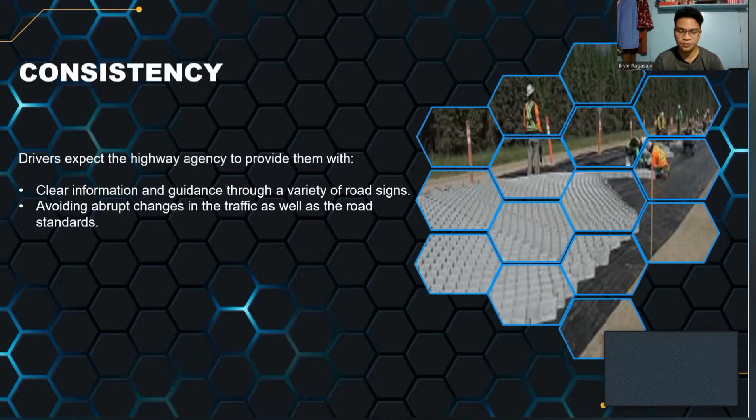Consistency. Consistency is the most important single rule in highway design, that is, making every element of the roadway conform to the expectation of every driver. Among the promising approaches to improve highway safety performance is the concept of highway design consistency. Drivers expect the highway agency to provide them with clear information and guidance through a variety of road signs and avoiding abrupt changes in the traffic as well as the road standards.

If these guides and directions could be planned properly to convey one single message at a time, and if these directions could be followed smoothly and easily without undue haste or changes in speed, then the road facilities are considered satisfactory, meaning if we're able to follow directions smoothly, then there will be no problems. Experienced highway engineers recommend that highway signs and directions should be integrated as early as preliminary layout studies.

Now, AASHTO is the American Association of State Highway and Transportation Officials. In 1914, the American Association of State Highway Officials, or AASHO, was established as an association of state, territorial, and District of Columbia highway departments and the Federal Highway Administration. The name was expanded in 1973 when the Department of Transportation was integrated into the association, renaming AASHO to AASHTO, giving the officials of this agency the power to govern its operation.

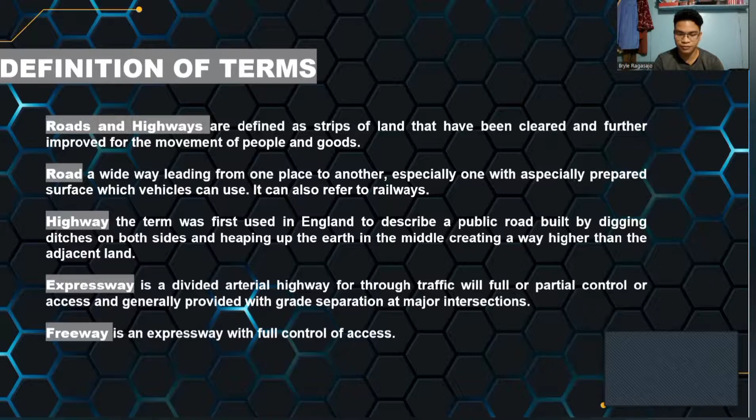Control of access is a condition where the rights of the owners or occupants of adjoining land or other persons to access, light, air, or view in connection with the highway are fully or partially controlled by public authority. There are two types of control of access, full and partial control of access. Both have the authority to control access and are exercised to give preference to through traffic by providing access connections to selected public roads, but the difference is that in full control, crossing at grade or direct private driveway connection is not permitted, while in partial control of access, crossing at grade and private driveway connections are allowed.

Through street or through highway. Every highway or portion thereof on which vehicular traffic is given preferential right of way and at the entrance to which vehicular traffic from intersecting highways is required by law to yield right of way to vehicles on such through highway in obedience to either stop signs or yield signs erected thereon. It is a street where vehicles passing through have the right of way as opposed to vehicles from intersecting roads which are obligated to stop before entering.

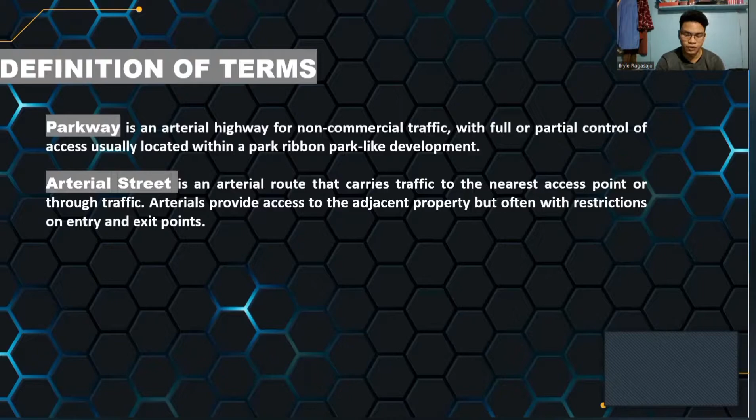There are basic considerations in planning arterial roadways. First is selection of the routes. Of course, it is important to know the best place to build the arterial. Two is studies of the traffic volume, like learning how much traffic it can divert from one place. Three is origin and destination, the location of the arterial roadway and how far it will go. Four is accident experience. Width should not be less than 15 meters, must carry at least one lane of traffic in each direction, should be at least 1 kilometer in length, and should skirt neighborhood areas rather than penetrate them.

On a grid design system street, arterials are spaced about 600 to 900 meters apart. When accident hazard is not a factor, the minimum volume to justify an arterial road is 300 vehicles per average hour during the day and 450 vehicles hourly during peak periods. Sometimes peak hour traffic volume on a designated arterial road exceeds the capacity of two-way streets. Now, to increase the arterial capacity, the following solutions are enforced.

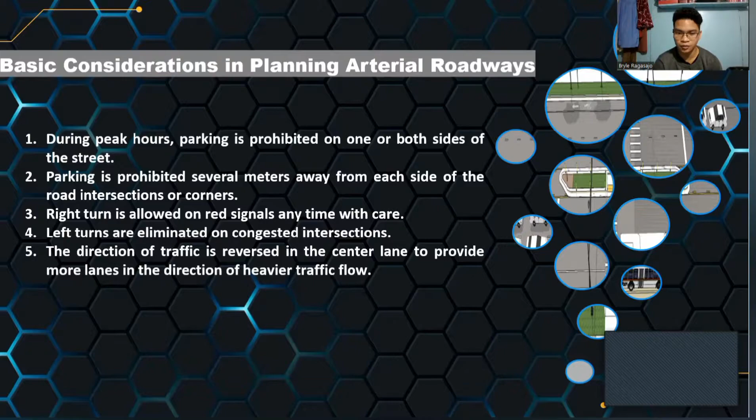During peak hours, parking is prohibited on one or both sides of streets. Parking is prohibited several meters away from each side of road intersections or corners, and right turn is allowed on red signals anytime with care. Left turns are eliminated at congested intersections, and the direction of traffic is reversed in the center lane to provide more lanes in the direction of heavier traffic flow.

Collector Street. It is a street forming a smaller mesh grid pattern where passengers are picked up from service streets and carried to the arterials. Large commercial enterprises or amusement facilities like drive-in theaters mostly front arterial roads. More like sumpay ni siya sa arterial roadway, like a street padong sa arterial roads.

Local roads are defined as a street or road primarily for access to residences, businesses, or other adjoining properties. It is also defined as a road constructed and maintained by the local government. Local roads or streets accept traffic from collector streets and distribute the traffic through subdivisions, neighborhoods, and business areas to individual homes, apartments, business sites, and industrial sites.

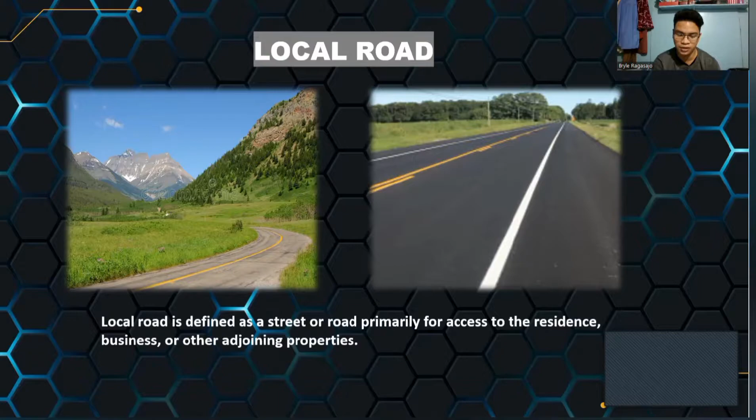Highway capacity. Highway capacity is defined as the maximum number of vehicles that are reasonably expected to pass a given point over a given period of time, usually expressed as vehicles per hour. Under ideal conditions, one freeway lane can accommodate about 2,000 passenger cars per hour, and a two-lane road can carry up to 1,000 passenger cars per hour in each direction. There's an obvious relationship between vehicle speed and highway capacity. As the volume of traffic approaches capacity, the average speed is markedly reduced.

Average annual daily traffic, or AADT. AADT or ADT refers to the traffic volume or flow on a highway as measured by the number of vehicles passing a particular station during a given interval of time. It is called average daily traffic if the period is less than 1 year. Volume may be stated as hourly observed traffic volume or estimated 30th hour volume, commonly used for design purposes. Some highway agencies use traffic volume for 5-minute intervals to distinguish short peak movements of vehicles.

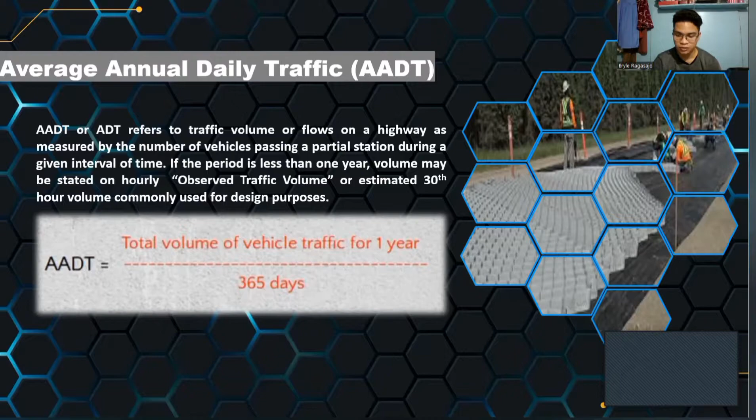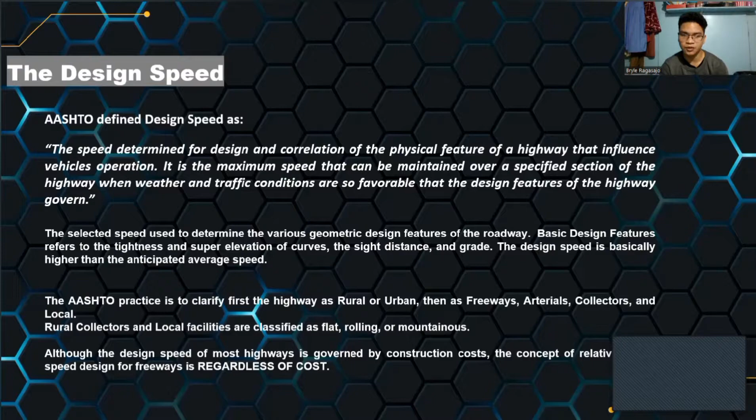So, design speed. There's no single set of geometric standards that will apply to all highways. For every highway segment, decisions regarding appropriate control for each of the many details or requirements must be addressed individually or separately. AASHTO defines design speed as the speed determined for design and correlation of the physical features of a highway that influence vehicle operation. It is the maximum speed that can be maintained over a specific section of a highway when weather and traffic conditions are so favorable that the design features of the highway govern.

AASHTO recommended that the design speed be set to the greatest degree possible to satisfy the needs of nearly all drivers both today and throughout the road's anticipated life. For economic reasons, the geometric features of a certain road section are designed for speeds from 30 to 50 kilometers per hour, and yet some motorists drive faster on a straight road alignment or less sharply curved sections. Under these situations, highway design adopts control by increasing the superelevation combined with easement curves, delineators, striping, signs, and rumble strips to alert motorists and inform them that they are approaching sharp or blind curves.

Selection of the proper road design speed is one of the most important decisions to make because it sets the limit to curvature, sight distance, and other geometric features. But because of the limited funds, there's a strong temptation to reduce this design speed. Such kind of decision is unwise because the alignment, grade, and sight distance after the roadway has been constructed and paved along the landscape and right-of-way become more difficult and expensive to adjust or to correct.

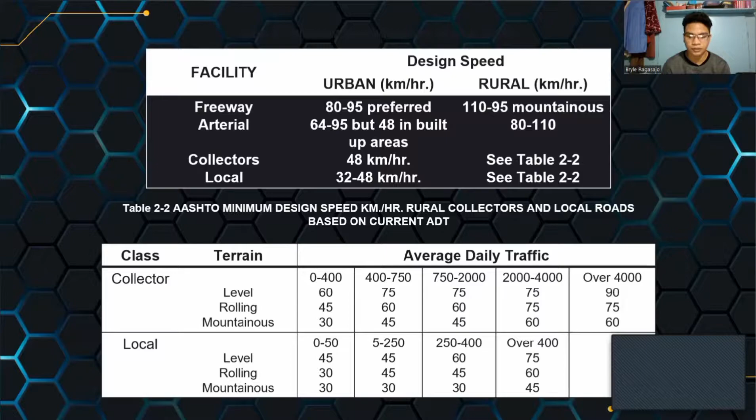The cross-section of a typical highway has a latitude of variables to consider, such as the volume of traffic, character of the traffic, speed of the traffic, and characteristics of motor vehicles and the drivers. Highway designs usually adopt a cross-section that is uniform in thickness from end to end of the improvement. This is acceptable on high-volume traffic road facilities. For low-volume traffic facilities, modifications of features like the shoulders' width in rough areas are usually employed to reduce costs.

A cross-section design generally offers the expected level of service for safety, and a recent study shows that a 7.20 meters wide pavement has 18% fewer accidents compared with a pavement narrower than 5.50 meters wide. A 7.20 meters wide pavement has 4% fewer accidents than the 6 meters wide roadway. And accident records show no difference between the 6.60 meters and 7.20 meters wide pavement.

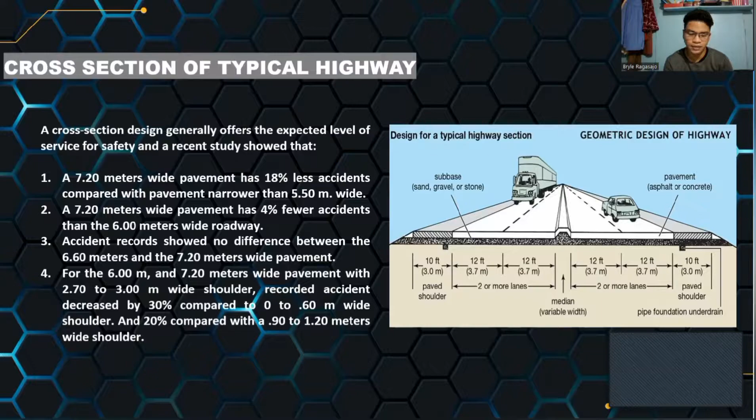Lately, the width of the road was standardized to 3 meters for first-class paved one-lane highways, and now a 3.60 meters wide surface was adopted as standard for freeways and other major traffic roadways, although there are strong demands to increase it further from 3.60 to 4.20 meters. For two-lane rural highways, a 7.20-meter wide surface is required for safe clearance between commercial vehicles and is recommended for main highways.

And for collector roadways, a 6-meter wide surface is acceptable only for low-volume traffic with few trucks traveling thereon. For local rural roadways, the minimum surface width is 4.80 meters for a 30 kilometers per hour design speed. And for urban roadways, the minimum design width is 3.60 meters, although 3 meters is allowed where space is limited.

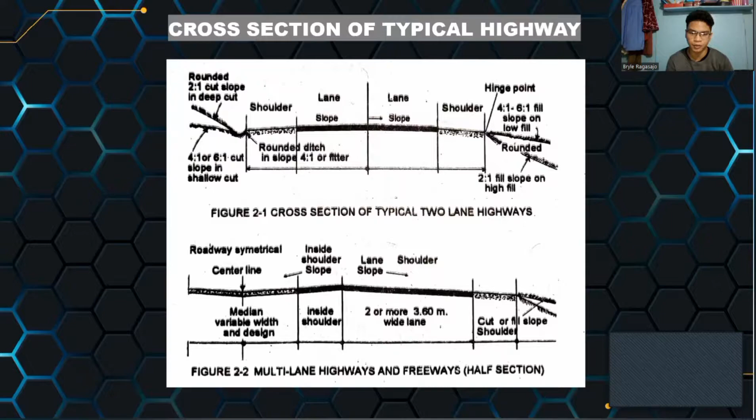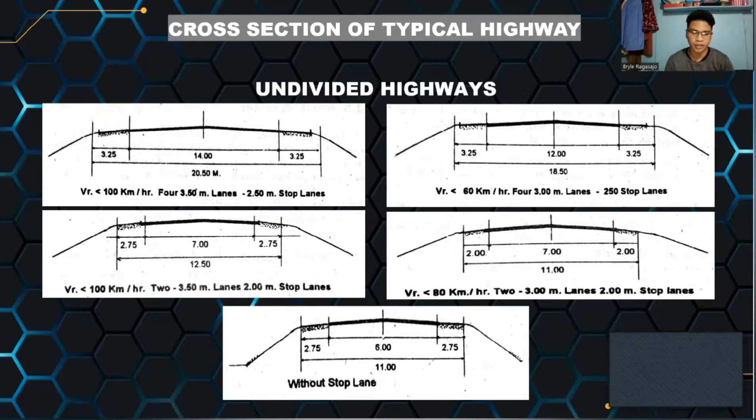Road shoulder. Road shoulder or verge is defined as the portion of the roadway between the edge of a traffic lane and the edge of a ditch, gutter, curb, or side slope.

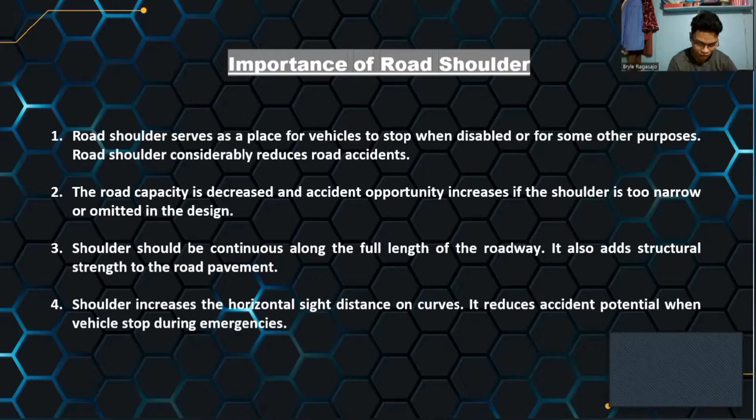So the policies on geometric design recommend that the outside shoulder should be paved at least 3 or 3.60 meters wide if truck volume is more than 250 in the design hour. The recommended width of the left or median shoulder is 1.20 to 2.40 meters, with at least 1.20 meters paved. If there are 6 or more lanes, the median shoulder should be 3 meters wide, or 3.60 meters if truck volume in the design hour exceeds 250.

For arterials with ADT less than 400, the usable shoulder width is fixed at 1.20 meters minimum, although 2.40 meters wide is much preferred. When the design hour volume ADT exceeds 400, the usable minimum shoulder width is 2.40 meters, although 3.60 meters is recommended. For urban arterial roads, a similar shoulder without curb is suggested unless needed for proposed drainage.

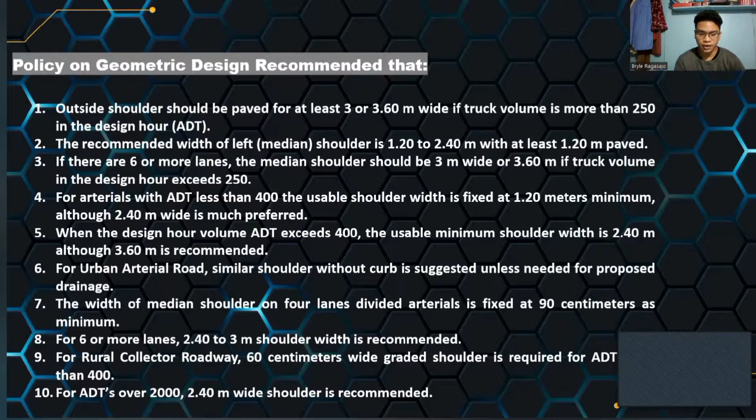The width of the median shoulder on 4-lane divided arterials is fixed at 90 centimeters as minimum. For 6 or more lanes, 2.40 to 3 meters shoulder width is recommended. And for rural collector roadways, a 60 centimeters wide graded shoulder is required for ADTs less than 400. And for ADTs over 2000, a 2.40-meter wide shoulder is recommended. And as the tables show, this is the width of the roadway for undivided highways.

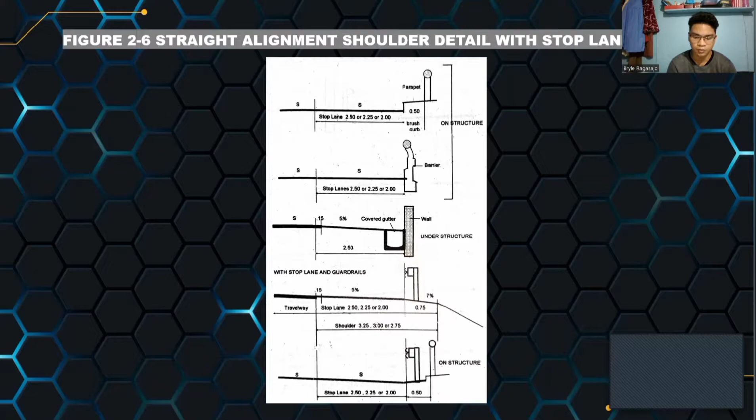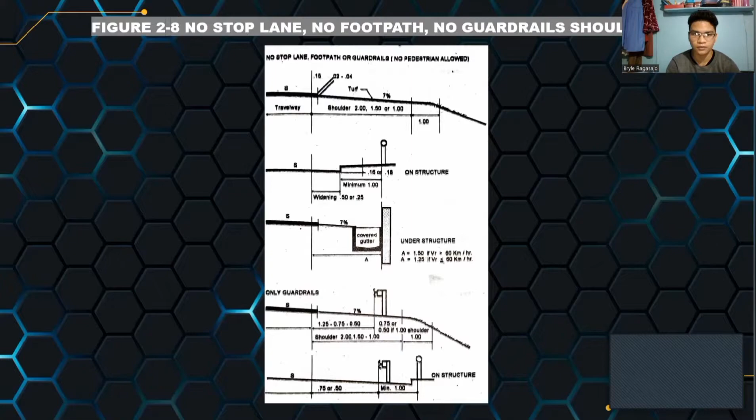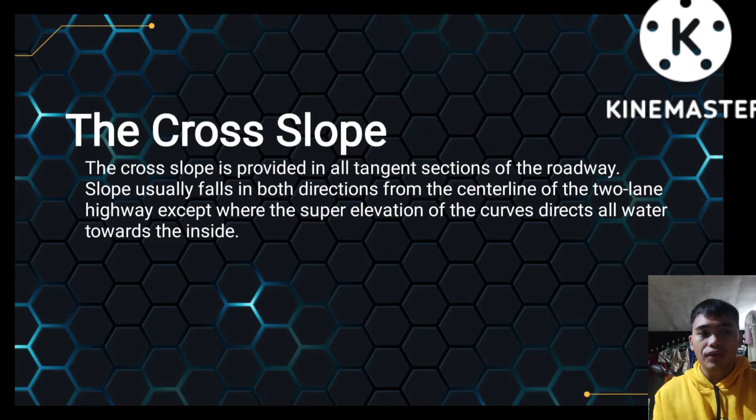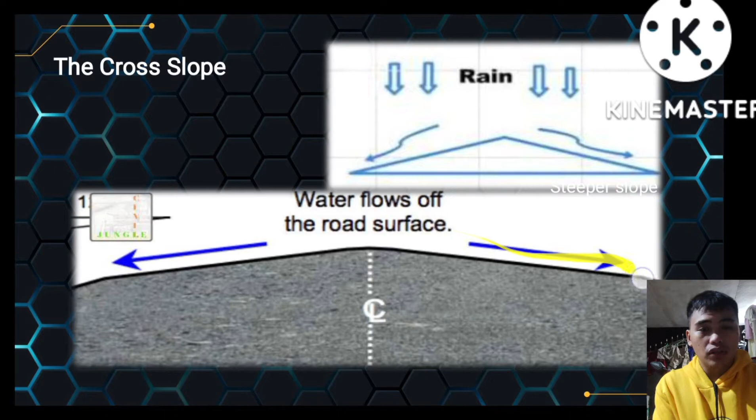The cross slope also applies to the shoulder. It can be a paved shoulder or gravel shoulder. The paved shoulder cross slope ranges from 2% to 6%, although 4% is the most common. As for the gravel shoulder, 4% to 6% slope is satisfactory, and 7% is effective drainage for turf surface.

So here I have an example of the paved shoulder and the gravel shoulder. The paved shoulder is made of cement, while the gravel shoulder is made of gravel or smaller rocks.

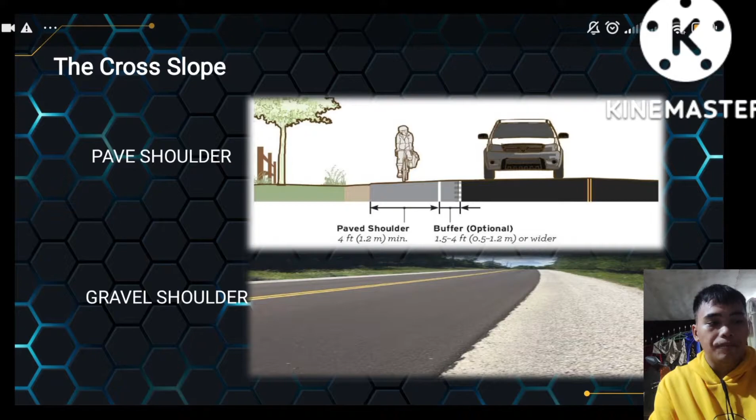There are also many types of road slope. The first is the cross slope, the most standard one. The second is the parabolic slope, which is only applicable if the gutter is deep enough to support draining water on the road. If the gutter is not deep enough, it's advisable to use a combination of uniform slope with the parabolic curve. That's the third type of slope.

Now we're going to move on to the next topic, the cut or fill slope. What is the cut or fill slope? From the word itself, it means cut, magbawas, and fill, magdagdag.

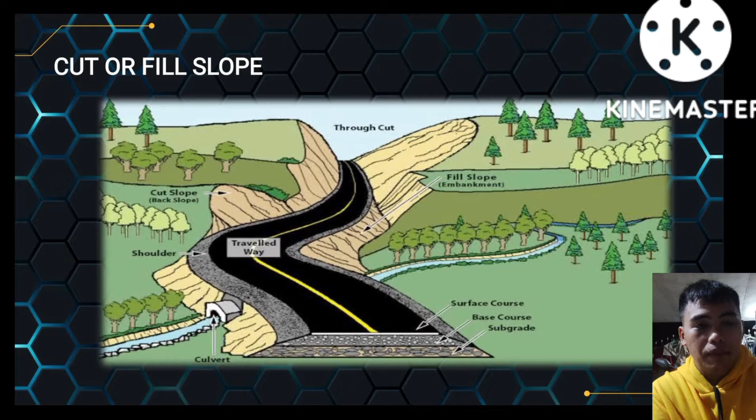So here I have an example of cut or fill slope. As you can see on the picture, the mountain has been cut through and built with the road. On the left side of the picture, you can see the cut slope or back slope, and beside or at the bottom of the road, you can see the fill slope or embankment. This mountain has been cut on the side to form the cut slope, then filled and flattened with soil to support building the road.

Here, earth fill of normal height is safe on a slope of 1 and 2 ratio. Second, slope of cuts through an ordinary undisturbed earth fill remain in place with a ratio of 1 and 1 slope. Cuts could be as steep as 1 and 2 ratio, and sometimes 1 and 4 ratio proven to be stable.

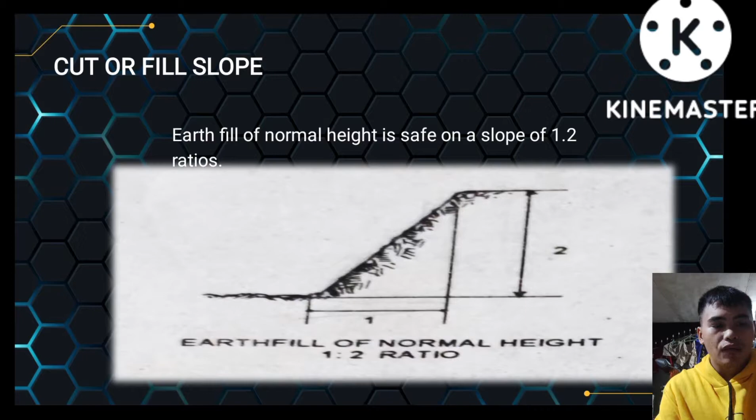Here I have a picture of the 1 and 2 ratio example of earth fill of normal height. And now the second picture is an example of the cut through ordinary undisturbed earth of 1 and 1 ratio.

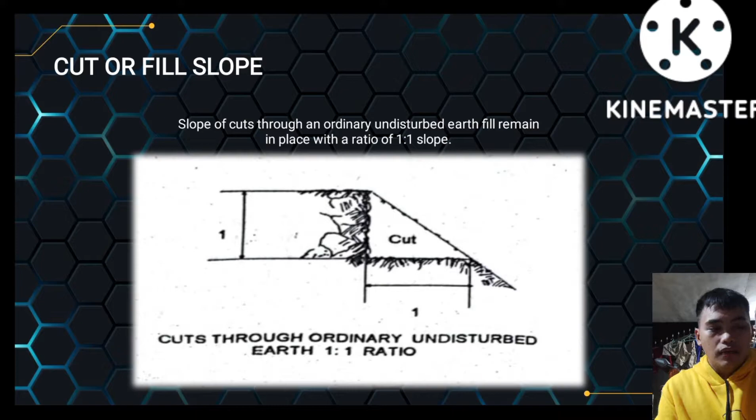Now we're going to talk about the advantages of the flat side or back slope. The first advantage is that with a back slope of 3 and 1 ratio or even flatter, cars could be directed to back into the road and come to a stop or continue down the slope with no risk of overturning. Second, flat fill slopes are visible from the vehicle at full extent, giving the roadway a safer appearance. Third, with a visible slope being low and flat, vehicles could be positioned or parked closer to the edge, and on a 2-lane roadway, facilities or parking would be farther from the opposing traffic.

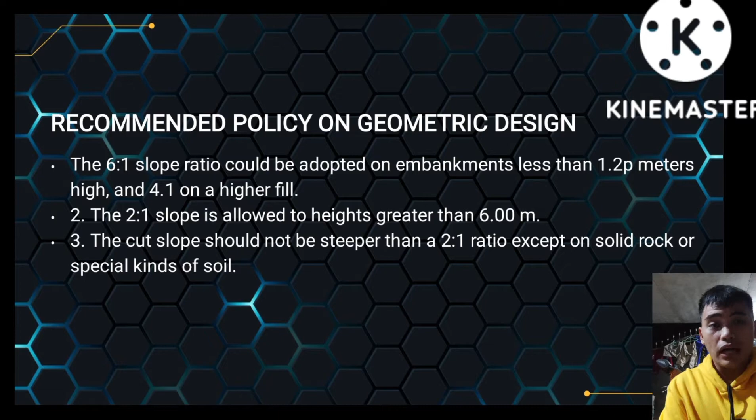There are also recommended policies on geometric design. We have three. First, the 6 and 1 slope ratio be adopted on embankments less than 1.2 meters high, and 4 and 1 on a higher fill. Second, the 2 and 1 slope ratio is allowed for heights greater than 6 meters. Third, the cut slope should not be steeper than a 2 and 1 ratio except for solid rock or special kinds of soil. Here is an example of the rock cut ratio from 1 and 2 or 1 and 4, only applicable for special kinds of soil or rock types.

The AASHTO also has a policy stipulating that where cut or fill slope intersects the original ground surface, the cross-section must be rounded to blend the slope with the natural ground surface.

When the side slope requires embankment with a suitable retaining wall, any of the following materials could be used depending on the natural condition. Here I have the first illustration or picture of what AASHTO recommends.

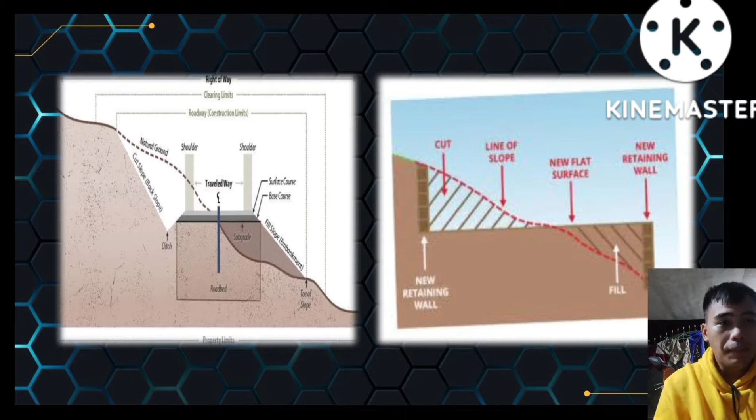The materials that could be used depending upon the natural condition for the retaining wall are: first, hand-placed stone; second, cement rubble masonry; third, concrete blocks; fourth, conventional reinforced concrete; fifth, T or counter-forted design; sixth, cribs assembled from timber; seventh, precast concrete; eighth, metal elements; ninth, tied-back piling; and tenth, lastly, earth reinforced with metal or plastic strips.

The number of lanes in a segment of highway is determined from the estimated volume for the design year AADT and highway lane capacity at the expected level of service. AASHTO policies accept a dually divided 16-lane roadway with 4 lanes in each direction for an inner freeway and 4 more lanes in each direction on the outside.

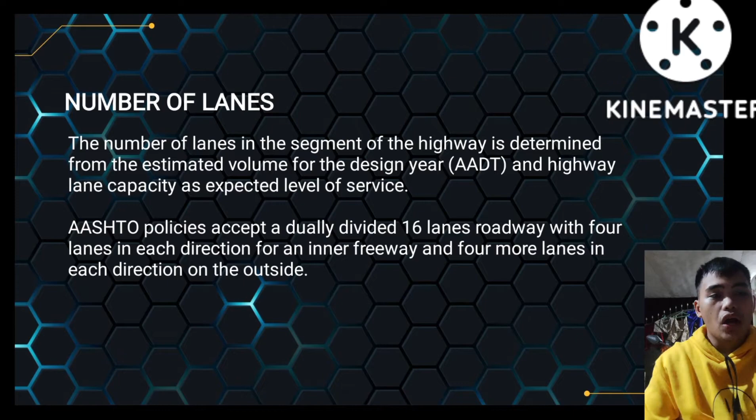Next is highway median. So what is highway median? From the word itself, it means road and something in the middle of the road. It could be a barrier or flat surface with plants or signs.

For example, the road near the Park Mall. As you can see, the road there has many types of medians, and its purpose is to prevent accidents.

Advantage of highway median. There are 13 advantages according to the book. The first is it is an effective means of reducing headlight glares, conflict, and accident between opposing streams of traffic.

Second, the median offers refuge between opposing traffic stream or cross traffic, and pedestrians could traverse each stream at separate maneuver. Third, median provides available space for left turn lane. Fourth, it makes the turning of vehicles smooth and safe operation.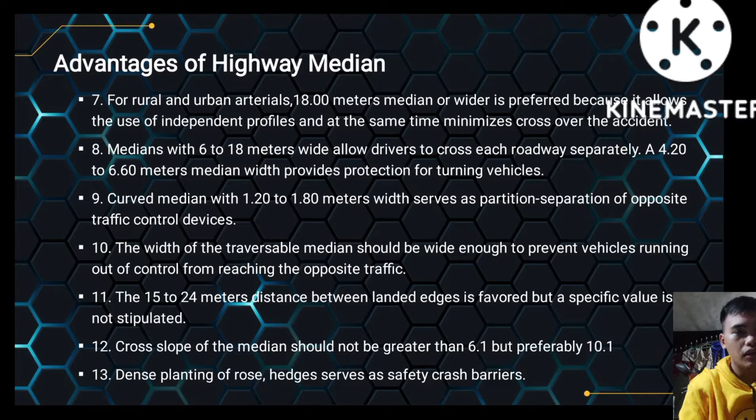For narrow median, you need to provide the tearing device, non-transversable energy absorbing device, non-transversable rigid barriers, and GM barriers. The tearing device is 2 sets of double strip printed on the existing pavement, raised diagonal bars, low curbing, and shallow dishes.

Non-traversable energy absorbing device: the line chain link fence is 1 meter high and supported by steel posts and reinforced by cables at the bottom of the midpoint. Non-traversable rigid barriers are metal guardrails. And lastly, GM barriers is high non-mountable slope face concrete barriers called New Jersey.

It is cast or extruded in place or precast in a section and set in position by the crane.

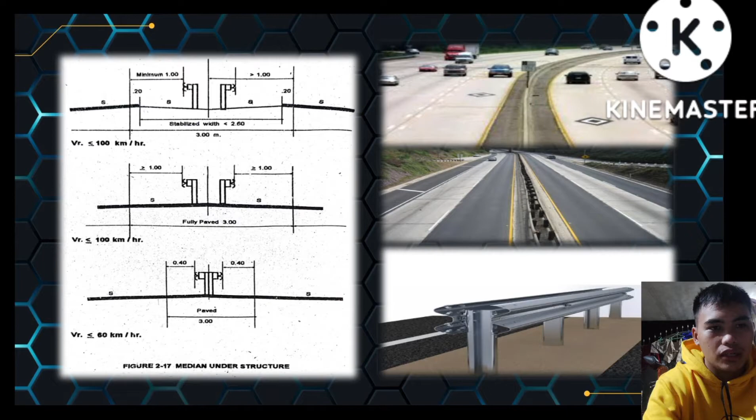Here I provide an example of highway median. It is median under structure. As you can see in the picture, it is the barrier or a wall between two roads. It also serves as protection from crashing and accident.

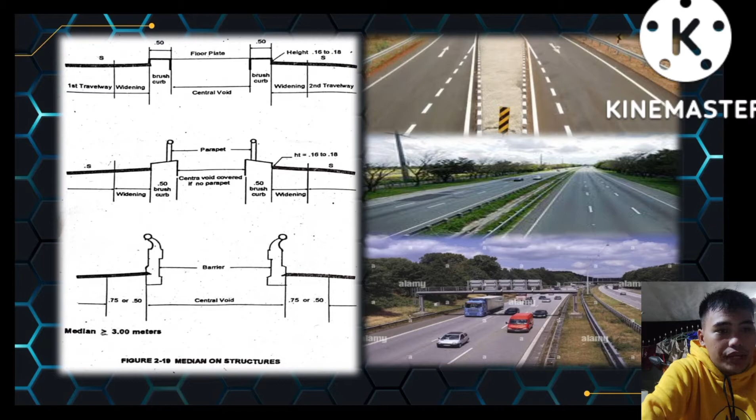And the third example is a central void median with a floor plate and a covered, if no parapet, or has a parapet median. And lastly is also a central void with barriers.

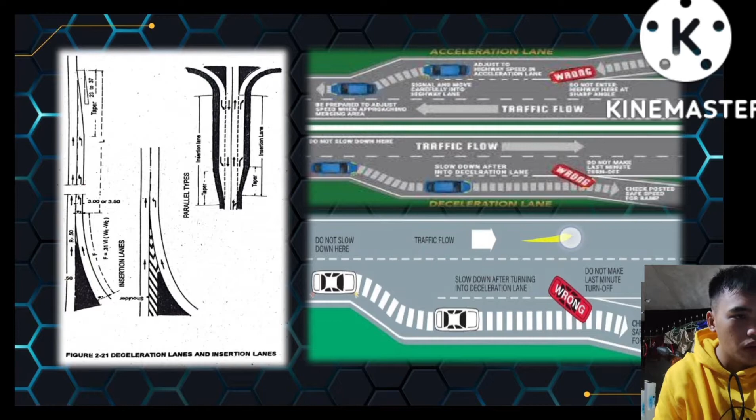Here, as you can see, there is an arrow that forms a parabolic curve towards the check posted safe speed for the ramp, or it is called the slowdown after turning into the deceleration lane.

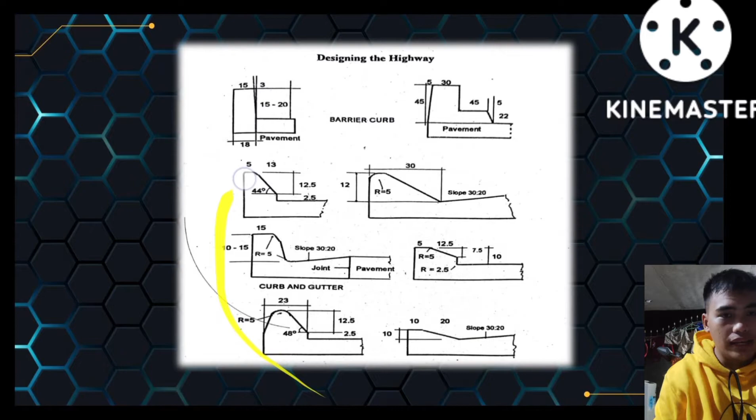And here are the designs or examples of barrier curbs. As you can see, it has different kinds and shapes, and also has a curb and gutter here. You can see this kind of barriers and curbs on the side of the road.

So let's proceed to grade line. So what is grade line? Grade line is defined as the longitudinal profile of the highway as a measure of how the center line of the highway rises and falls.

So in laying the grade line, the designer must consider the following. First, where earthworks is minimal and consistently meeting slight distance in relation to grade line. The economy is one of the main considerations.

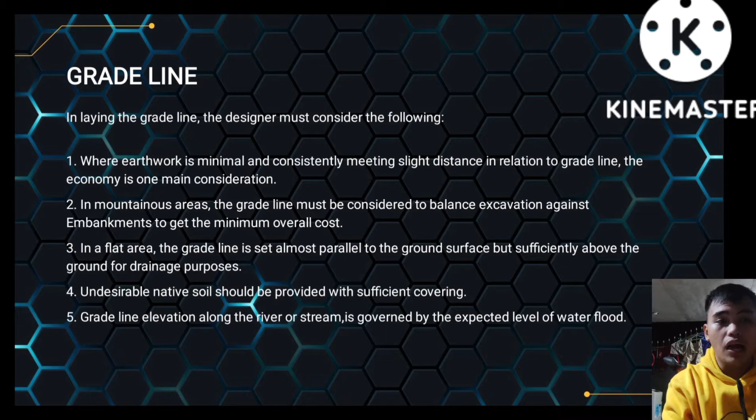Third, in flat areas, the grade line is set almost parallel to the ground surface but sufficiently above the ground for drainage purposes. Number 4, undesirable native soil should be provided with sufficient covering. Number 5, grade line elevation along the river or stream is governed by the expected level of water flood.

So that's all for my topic. I hope you learned something.

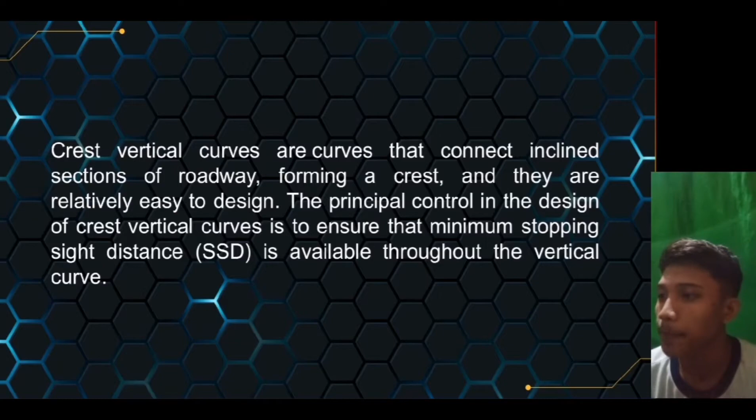The minimum curve length was suggested by AASHTO, the American Association of State Highway and Transportation Officials, to be 0.6 times the velocity in kilometers per hour, for a distance in meters.

The vertical distance from the intersection of the straight grade line to the curve is equal to 1/8 of the product of the algebraic difference in grades and the length of the curve in stations. This is called the maximum correction.

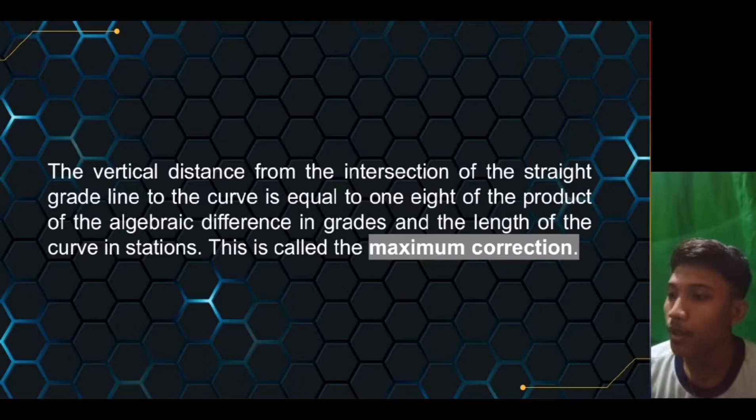The rate at which the curve departs vertically from both tangent grade lines is proportional to the square of the horizontal distance from the end of the curve.

The correction at any intermediate point is obtained by: 1, multiplying the maximum correction by the square of the horizontal distance between the near end of the curve and the point; 2, dividing this product by the square of 1/2 the length of the curve.

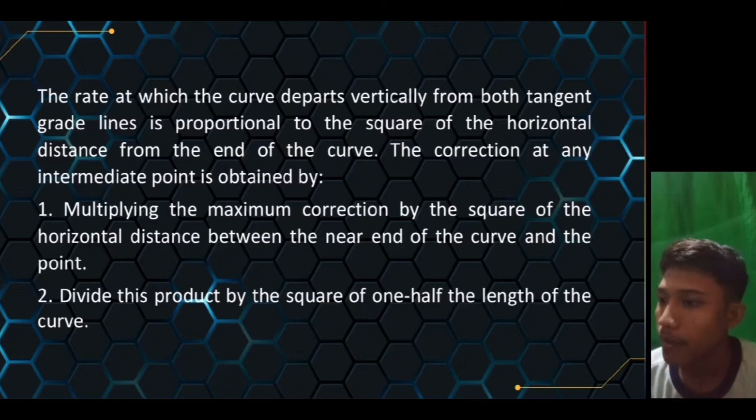Right of way. Railway right of way means a strip of land that is granted through an easement or other mechanism for transportation purposes. A right of way is reserved for the purposes of maintenance or expansion of existing services within the right of way.

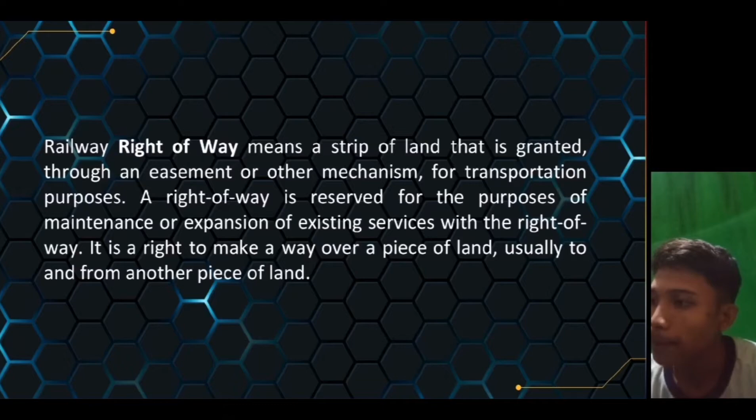It is a right to make a way over a piece of land, usually to and from another piece of land. A successful freeway and expressway operation closes the roadway from direct access to adjoining property and some local roads or streets. If local traffic and land use are to be served, it must be served by service roads originally planned as part of the main freeway.

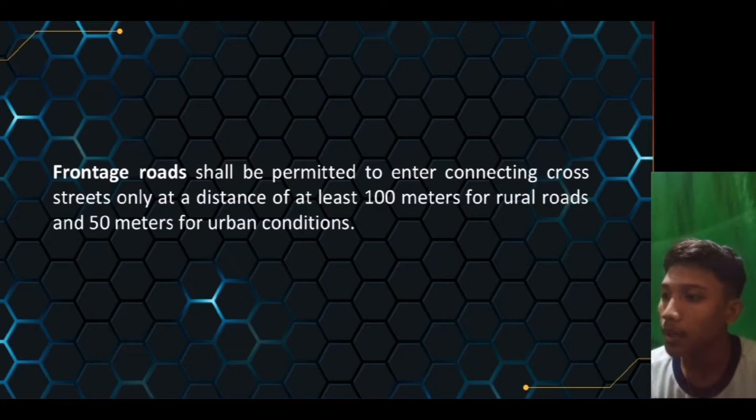Frontage roads shall be permitted to enter connecting cross streets only at a distance of at least 100 meters for rural roads and 50 meters for urban conditions.

Stopping sight distance. Stopping sight distance is one of several types of sight distance used in road design. It is a near worst-case distance a vehicle driver needs to be able to see, in order to have room to stop before colliding with something in the roadway, such as a pedestrian in a crosswalk, a stopped vehicle, or road debris.

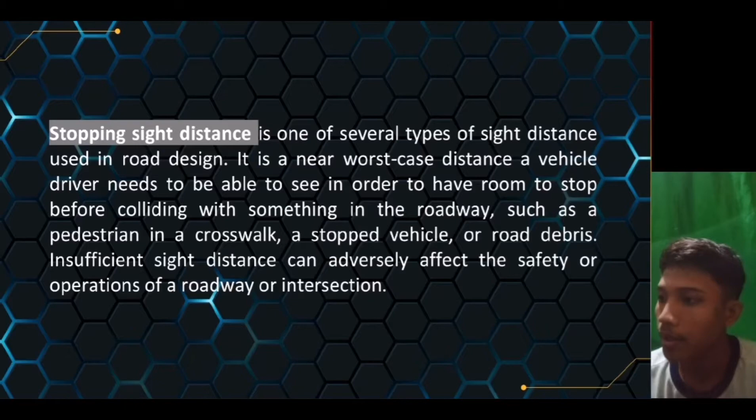Insufficient sight distance can adversely affect the safety or operations of a roadway or intersection. It is defined as the longest distance that a driver could see the top of an object 15 centimeters above the road surface, where the design height of the driver's eye above the pavement is 105 centimeters.

Stopping distance is made up of two elements. 1, the distance traveled after the obstruction or object is seen and before the driver applies the brakes. 2, the distance consumed while the driver applies the brakes for the vehicle to stop.

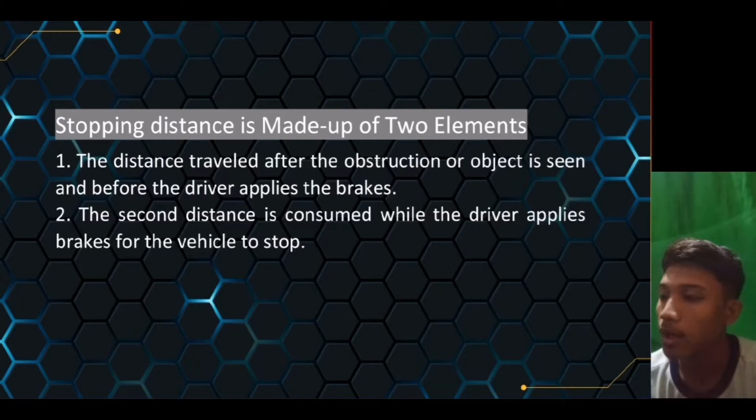The distance covered could be expressed by the following formula: D equals T M over S.

Braking distance: D is equal to (m/s)² over 2gf, and D is equal to (m/s)² over 19.6f, where m/s is the initial speed in meters per second. T is detection, recognition, decision, and response initiation. g is the acceleration of gravity, 9.81 meters per second squared. f is the coefficient of friction between the tire and pavement.

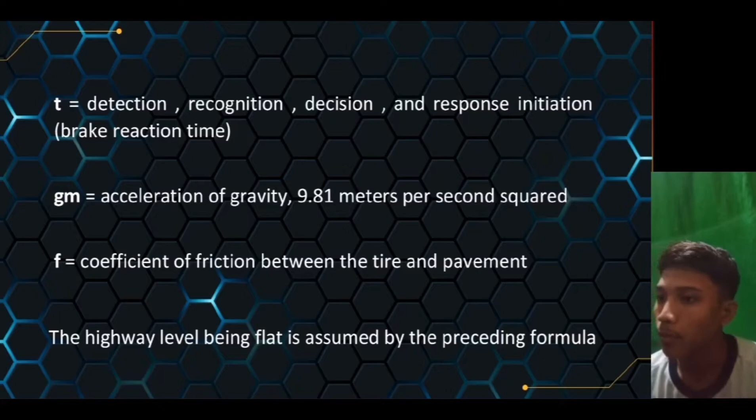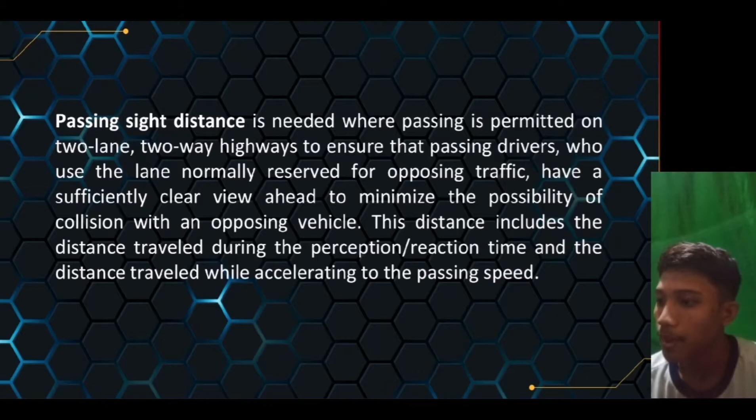The passing sight distance. Passing sight distance is needed where passing is permitted on two-way highways to ensure that passing drivers who use the lane normally reserved for opposing traffic have a sufficiently clear view ahead to minimize the possibility of collision with an opposing vehicle. The distance includes the distance traveled during the perception or reaction time and the distance traveled while accelerating to the passing speed. It is the longest distance that a driver can see the top of an oncoming vehicle while the driver's eye level is 1.05 meters above the pavement surface.

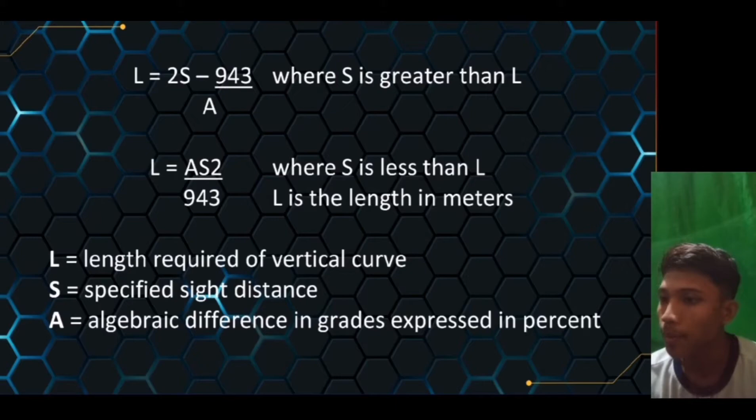The relationship between the passing sight distance, the algebraic difference in grades, and the length of vertical curve is represented by the following equations: L is equal to 2S minus 943 over A, where S is greater than L, and L is equal to AS² over 943, where S is less than L, and L is length in meters. L is the length required of the vertical curve and S is the specified sight distance. A is the algebraic difference in grades expressed in percent. The design of two-lane highways for passing over crests is generally practical only on flat grades because longer vertical curves are required to provide passing sight than stopping sight distance.

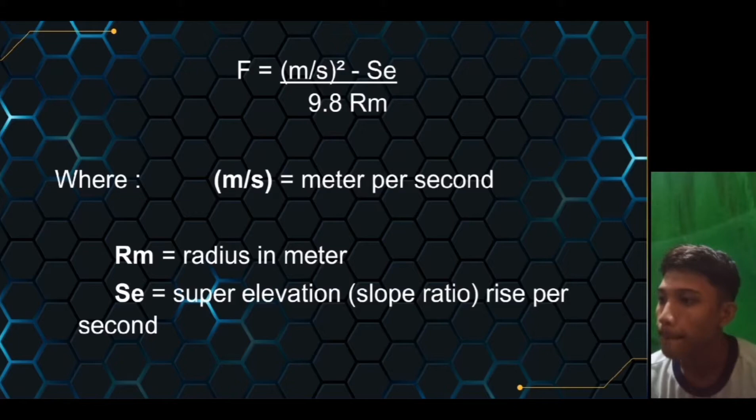f is equal to (m/s)² minus SE over 9.8 Rm, where m/s is the speed in meters per second, Rm is the radius in meters, and SE is the superelevation. At 75 km per hour, the maximum coefficient of side friction on dry pavement, as determined by curve testing, is approximately 0.35 for smooth tires and 0.4 to 0.5 with normal pavement. The two tables show the AASHTO minimum passing sight distance for design of two-lane highways and the AASHTO recommended maximum coefficient of side friction.

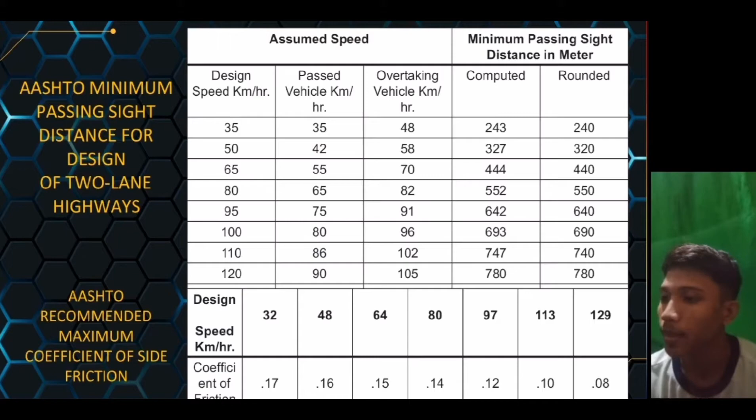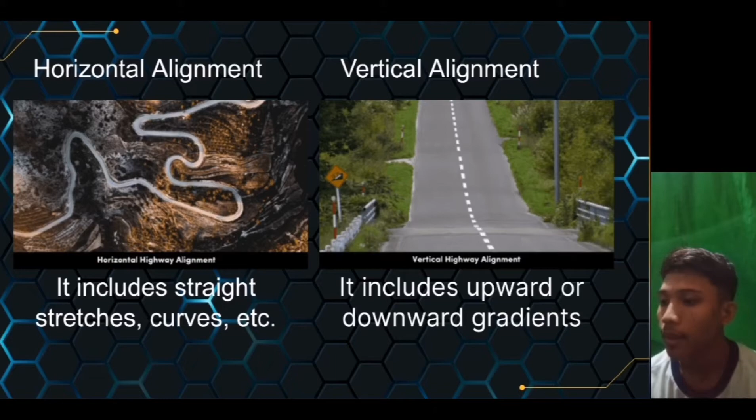Road alignment. The alignment is the route of the road, defined as a series of horizontal tangents and curves. The profile is the vertical aspect of the road, including crest and sag curves, and the straight grade lines connecting them. It should be consistent. An abrupt change from flat to sharp curve, and long tangents followed by a sharp curve, should be avoided because it will create hazard and invite accidents. There are two types of road alignment: one is the horizontal alignment and two is the vertical alignment. Horizontal alignment includes straight stretches, curves, etc., while vertical alignment includes upward or downward gradients. And lastly, this is an example of both alignments.

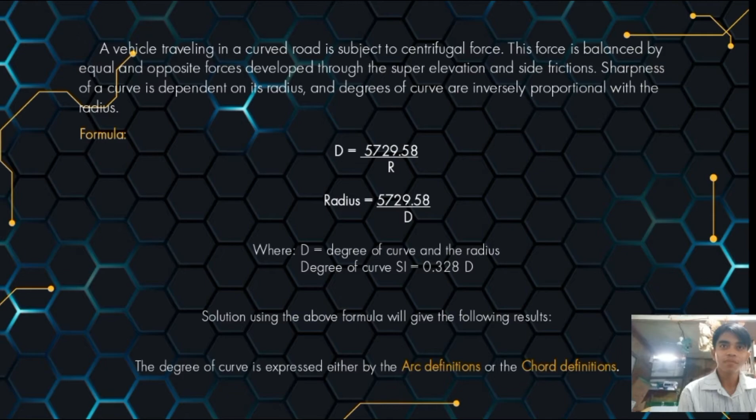Arc definition: the degree of curve is the central angle subtended by a 20-meter arc of the curve. And chord definition: the degree of curve is the central angle subtended by a 20-meter chord.

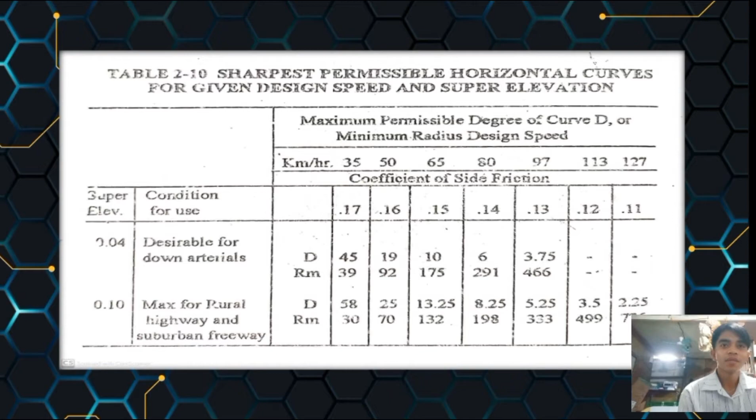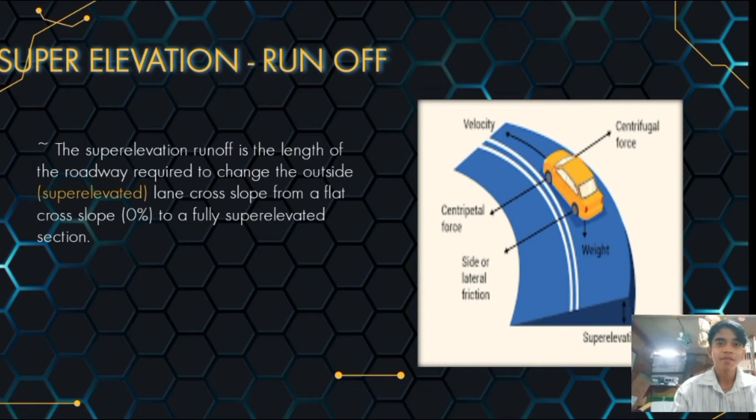Then, the center of each individual roadway at a profile grade is maintained while raising the outer edge and lowering the inner edge to maintain the desired super elevation. It is done by raising up the outside edge of the pavement with relation to the center line until the outer half of the cross-section is flat. So, this is the figure of super elevation of curves. So, this is the table, guys, for the suggested minimum length of super elevation runoff for 2-lane 3.60 meters lane. You can see it in the picture.

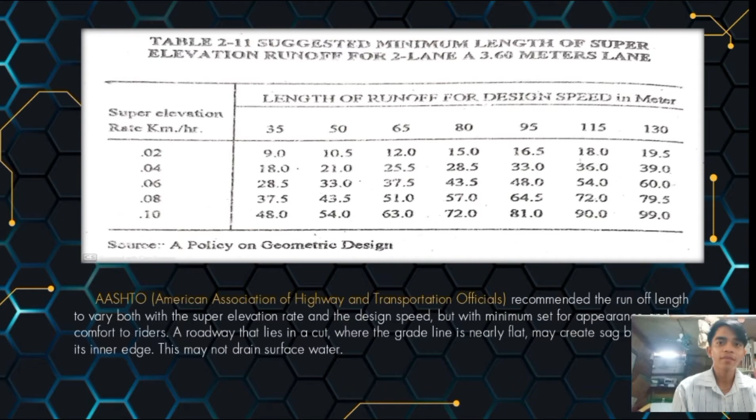Then, AASHTO, the American Association of State Highway and Transportation Officials, recommended the runoff length to vary both with super elevation rate and the design speed, but with minimum set for appearance and comfort to riders. A roadway that lies in a cut where the grade line is nearly flat may create sag by lowering its inner edge. This may not drain surface water. It is recommended that 60% to 80% of the runoff from an elevated alignment should be on a tangent. It's possible to achieve super elevation by raising the outer edge of the alignment twice the usual distance.

So for wider roadways, the length given on table 2-11 should be increased as follows. First, if 4 lanes, individual value increased by 50%. Next, 6 lanes, individual value increased by 100%.

Widening of curves. A provision for a wider roadway is necessary on sharp curves for 2-lane pavement for the following reasons. First, to force the drivers to shy away from the pavement edge. Second, to increase the effective transverse vehicle width for non-tracking of front and rear wheels. Third, to give additional width due to the slanted position of the front wheel to the roadway's center line. The last one is for a 7.20 meters wide roadway, an additional width of 30 centimeters is necessary on an open curve highway.

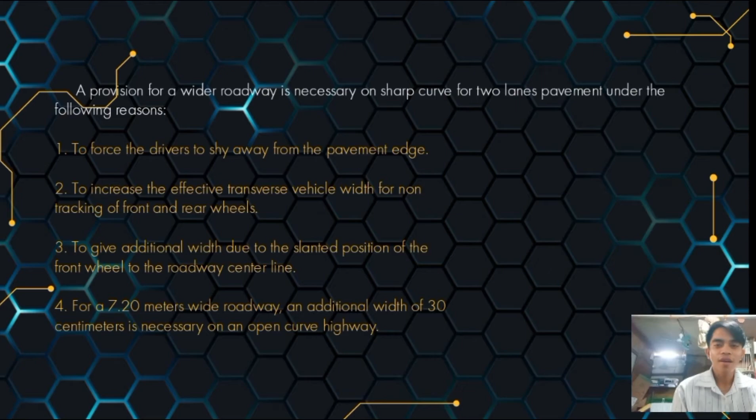Reverse circular curves are seldom used on modern highways, but reverse curves that are provided with proper length easements between them are acceptable. If no easement curve is allotted, curves in opposite directions should be separated by a tangent several meters long. Roads with compound curves that change abruptly from one sharpness to another confuse the drivers and in turn they shift position within the lane and sometimes veer out of it. Compound circular curves of different radii are considered poor design, especially in rural areas.

AASHTO recommends again that the radius of the flatter curve for rural highways should never be more than 50% greater than that of the sharper one. For urban intersections, an easement curve is considered, which introduces the changes in radius gradually. Super elevation changes along this transition section.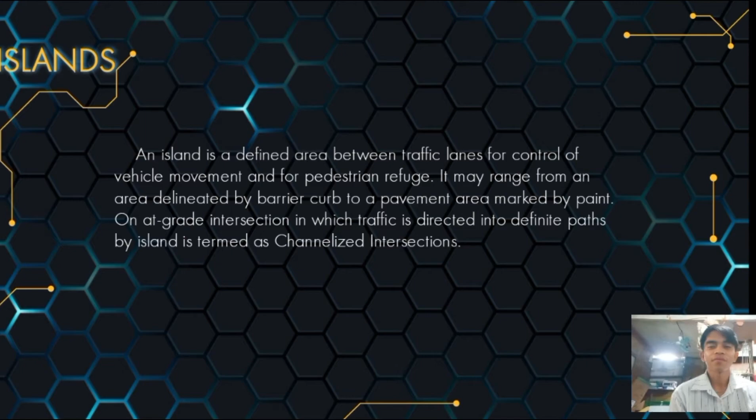Islands. An island is defined between traffic lanes for control of vehicle movement and for pedestrian refuge. It may range from an area delineated by barrier curb to a pavement area marked by paint. An at-grade intersection in which traffic is directed into definite paths by islands is termed a channelized intersection. Islands are included in the design of intersections for the following purposes. First, separation of vehicular flows. Second, separation of conflicts. Third, reduction in excessive pavement areas. Fourth, reduction of traffic and indication of proper use of intersections. Fifth, arrangement to favor a prominent turning movement. And the last one is location of traffic control devices.

These are usually the main cause of confusion which leads to road accidents. When cross traffic meets at a flat angle, head-on collision could be more serious. A right angle at 75 degrees to 105 degrees is most favorable, giving the driver the opportunity to assess or calculate the position and speed of oncoming vehicles. By channelization, funneling is also effective in preventing overtaking and passing in conflict areas. A well-studied super elevation is an important adjunct to channelization that regulates the vehicle speed, and first, prohibited turns are prevented. Next, refuge may be provided for turning or crossing vehicles and pedestrians.

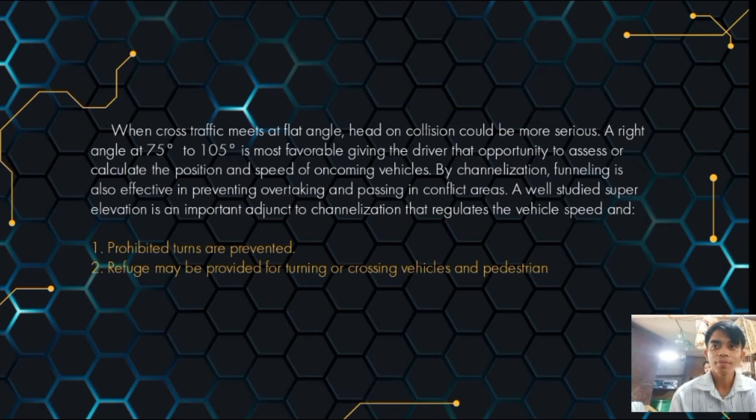The third one, by channelization, refuge may be provided for turning crossing vehicles and pedestrians. The fourth one, the driver has to face only one decision at a time. Hence, conflicts can be avoided. The last one, it provides location for the traffic control devices like signs, signals, and refuge for pedestrians.

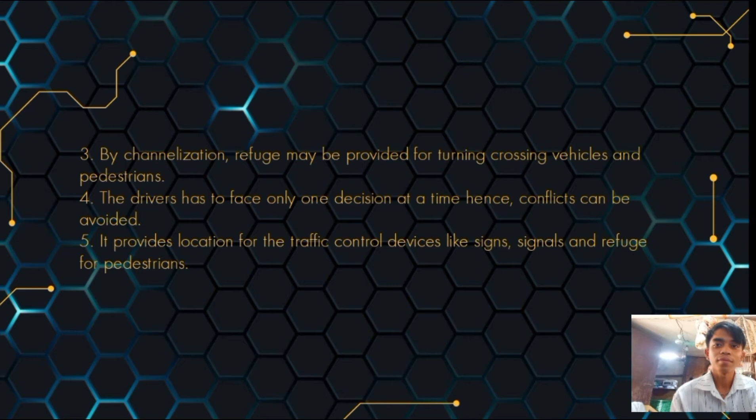Types of interchange. The form of freeway interchange requires selection of the configuration that is best suited to a particular situation and demand. The functions of freeway interchanges are: first, to provide separation between two or more traffic arteries. Second, to facilitate the easy transfer of vehicles from one artery to the other or between local roadway and the freeway.

Diamond type interchange is recommended where the freeway crosses a non-freeway arterial, and the cloverleaf type interchange is recommended for freeway and arterial intersections. Intersecting arteries are separated and free of intersections. The diamond interchange is the most cost-effective form of interchange.

Objections to the cloverleaf interchange design. First objection, it requires a large area of land. Second, at higher design speed, more time is consumed just to traverse the longer loops. Third, vehicles making a left turn execute a 270 degree right turn and travel greater distance, becoming unpleasant and hazardous due to the sharp curves and steep grades. Last one, vehicles leaving the curved loop in one quadrant weave with those entering the adjacent loop from the through roadway.

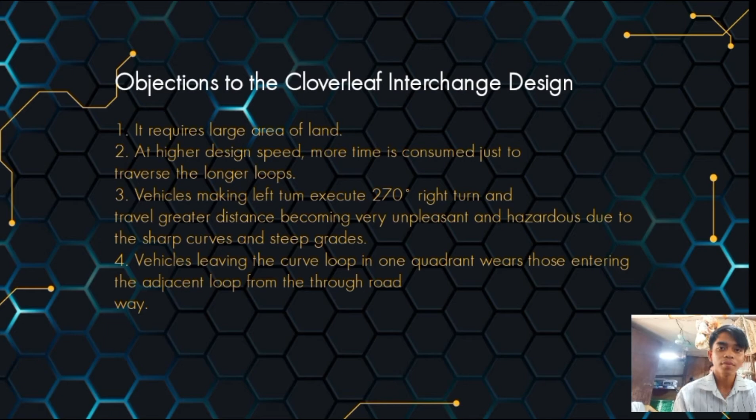Under this type, weaving and merging movements are separated. Alternative cloverleaf design with collector distributor is recommended for one or two through streets if added paving and structures can be justified. When freeway meets freeway, where traffic movement is heavy, an interchange is provided with directional left turns in all four quadrants.

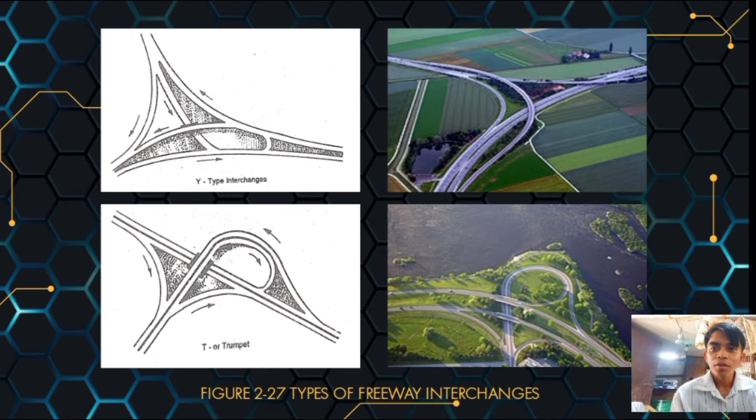Figure 2-27, types of freeway interchange. We have Y-type interchanges and T or trumpet. Then figure 2-28, types of freeway interchanges. We have diamond interchanges, partial cloverleaf. Figure 2-29, channelized interchanges. We have directional interchanges and through freeway with rotary flyover with roundabout.

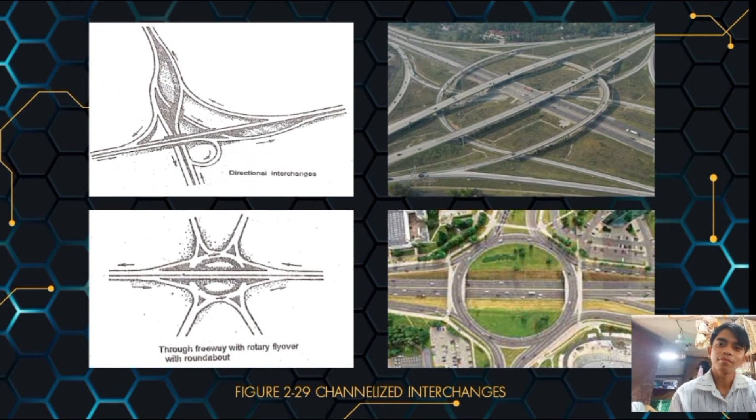Good afternoon, everyone. So today I will continue our topic and I will talk about highway intersections at grade. It is stated that all highways except freeways have intersections at grade. The intersection area is considered to be part of the connecting road.

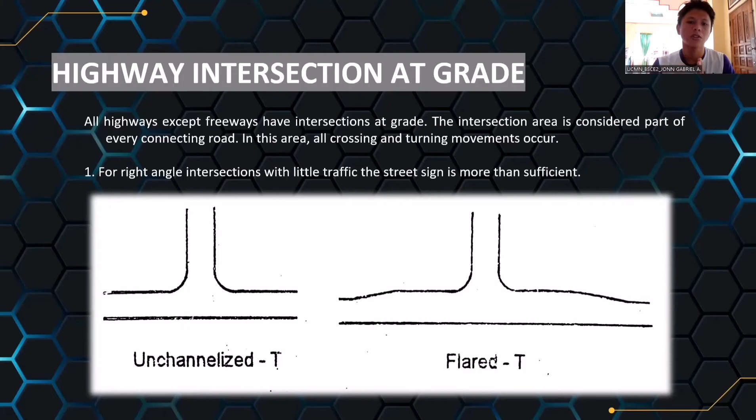So for number 2, for Y intersection or other related configuration where vehicles meet at unfavorable angles, it may require channelization.

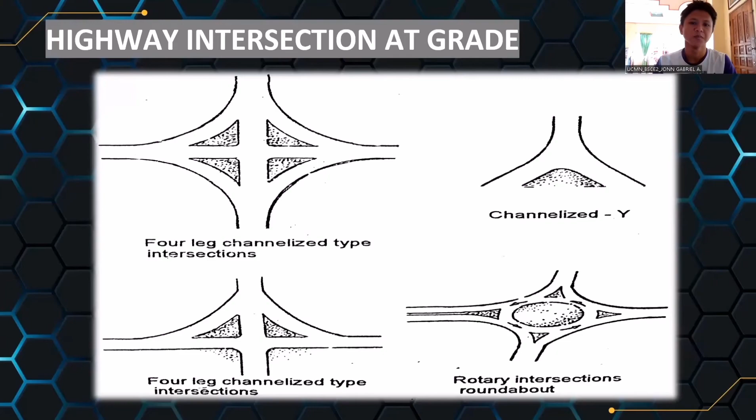So number 3, the flare design will involve the following. Letter A, widening the entering lanes to allow deceleration of the car clear of through traffic. B, widening the leaving lanes to provide acceleration and merging from traffic lane strips.

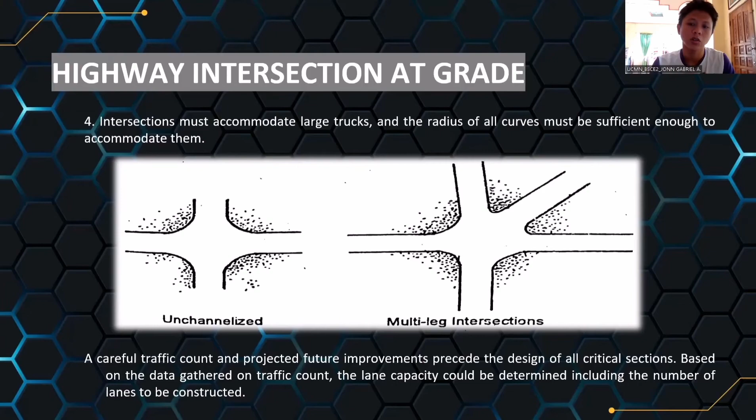So, it must accommodate these large trucks. A careful traffic count and projected future improvements precede the design of critical sections. Based on the data gathered on traffic count, a lane capacity could be determined, including the number of lanes to be constructed. So my next subtopic is freeway entrance and exit.

So for a single lane on-ramp, vehicles flow into the outer continuing freeway lane. The design is either a tapered blending to the lane or an auxiliary lane parallel to the through lane. In either case, sufficient lane length is required to allow the vehicles to accelerate and merge into ongoing vehicle streams at speed near to the freeway.

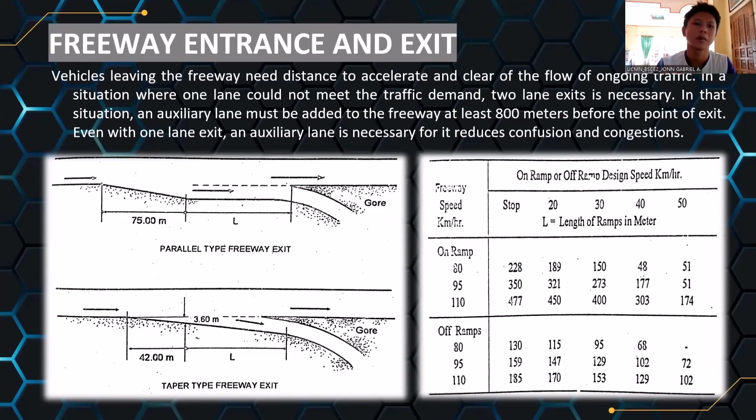So, railroad and highway separation. The main question asked in a railroad and highway separation is whether one is to go over the railroad or the highway. So which one is on top, the railroad or the highway? So what are your ideas? So let's get into it.

If the highway is to go over the railroad, the structure itself is lighter and the highway load is much smaller than the railroad loads. With regard to the vertical clearance height, the railroad requires a minimum of 7 meters as against 4.8 meters clear distance above the highway.

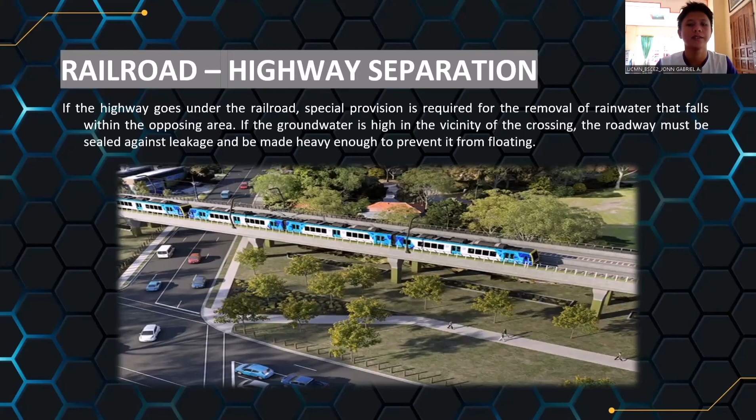So, the last topic of our group is the bicycle lane. Bicycle lanes are now becoming popular due to the energy crisis and traffic problems. It requires a separate road for the riders that is entirely separate from the vehicular traffic.